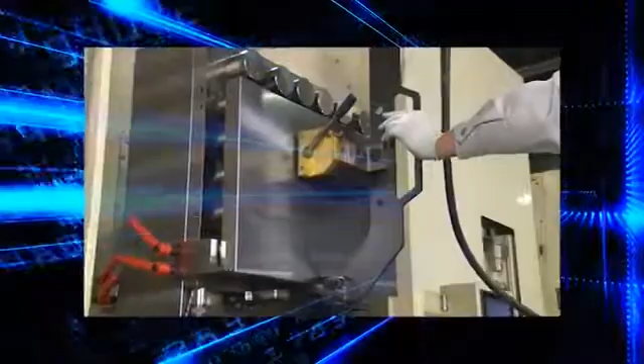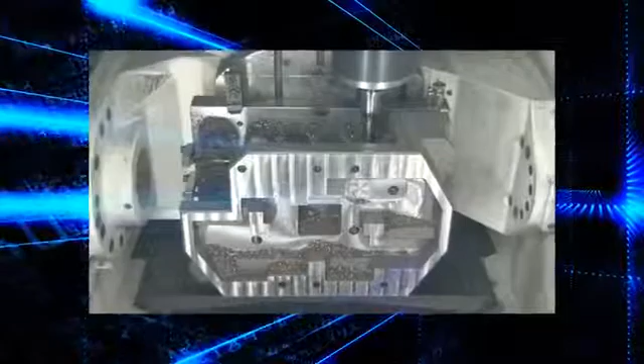The entire workpiece can be secured from the bottom with a single button, drastically reducing the setup times. Less cutting blade interference means machining tasks can be consolidated. Introducing Nabeya's Permanent Electro MTB Magnetic Chuck for Milling.

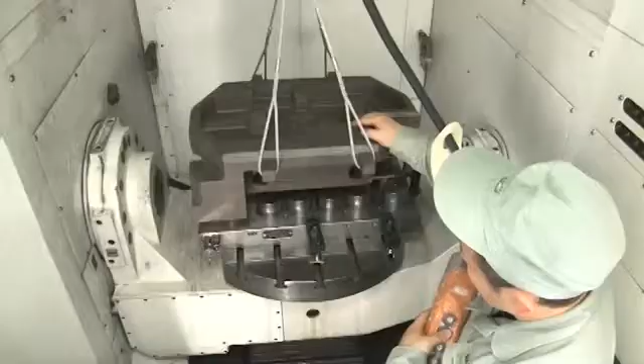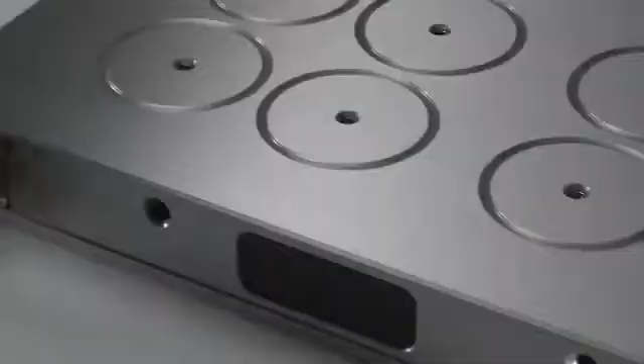As the global production system continues to develop, manufacturers increasingly need to shorten the time spent on setup and machining. At the same time, production facilities are being built in multiple countries, and companies have to work urgently to establish standardized manufacturing methods with increased automation and reduced manpower. Nabeya's magnetic chuck can respond to these needs.

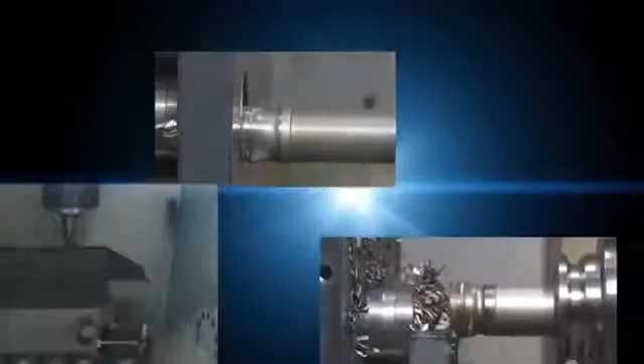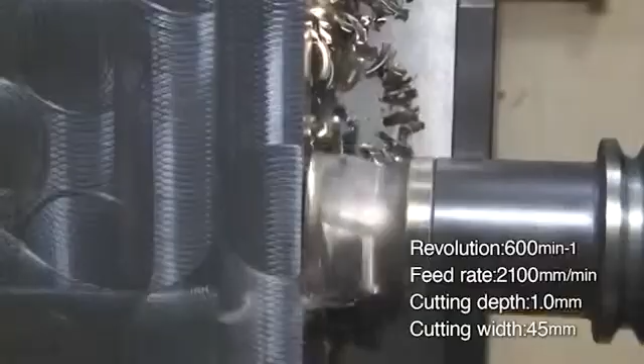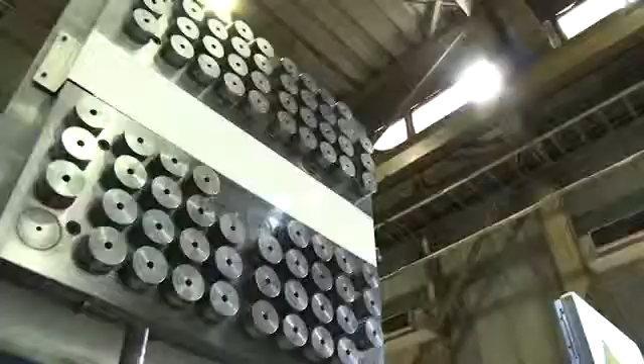Let's take a look at some of the many milling tasks where the magnetic chuck is used. As you can see, the chuck demonstrates its strength not just on top face and side face milling, but on integrated 5-axis machining centers too. Multiple magnetic chucks can be linked via junction boxes, as required to accommodate extra-large workpieces.

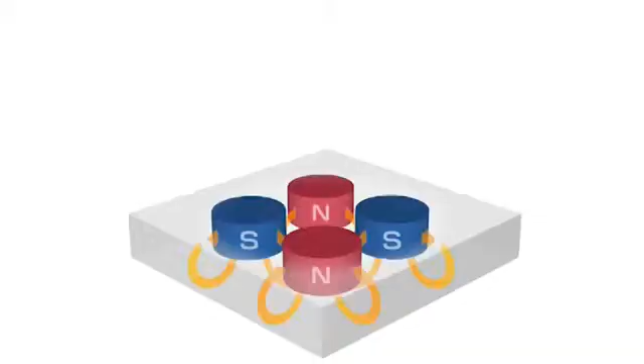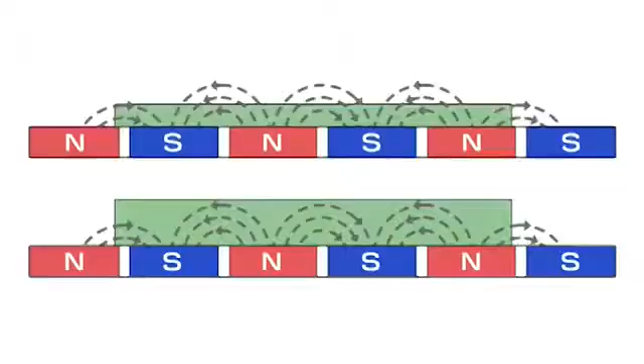Here we shall answer some frequently asked questions. Do chips with magnetic force interfere with the machining process? With the magnetic chuck, the magnetic force loops from north to south poles through the workpiece. This helps prevent the chips from attaching to the workpiece cutting surface. As you can see, even with a powerful adhesion force of 6,150 Newton for each magnetic pole, the chips are not captured by the magnet.

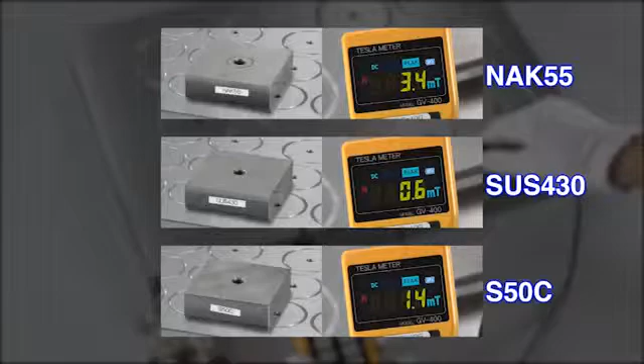Does magnetic force remain on workpieces? The amount of residual magnetism varies, depending on the workpiece material, but it is possible to remove it with demagnetization. We also provide Magheight blocks with a lift mechanism to remove workpieces that remain attached by residual magnetism when unclamping.

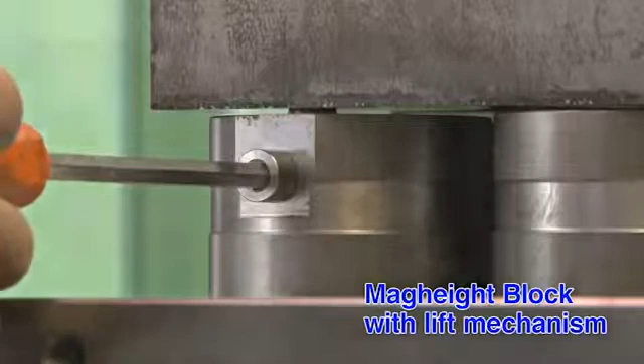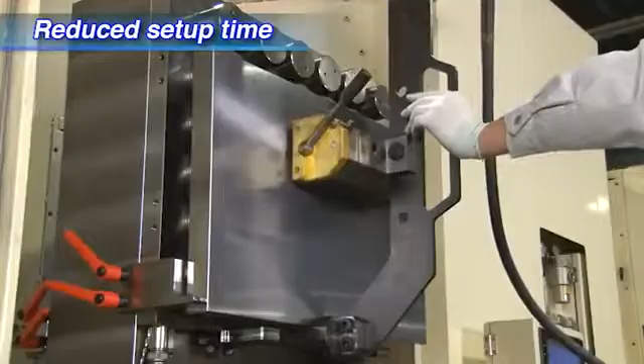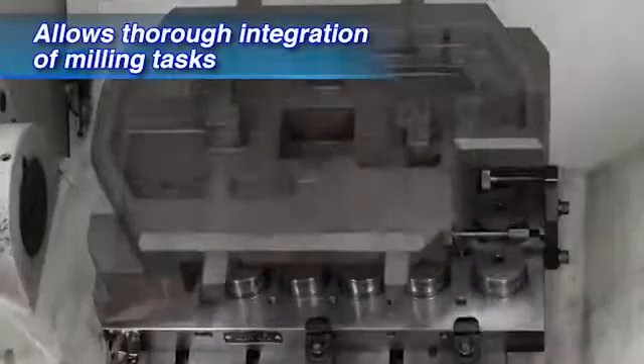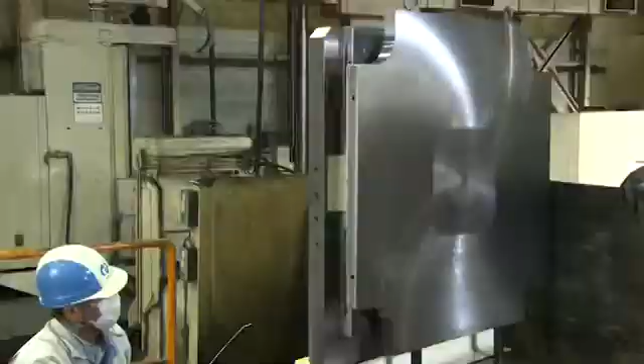Drastically reducing the setup times. Allows thorough integration of milling tasks. The workpiece is secured from the bottom, so clamps do not obstruct the upper or side surfaces. This means milling tasks can be carried out together. Reduces deformations. The workpiece is secured magnetically across the entire bottom surface, minimizing deformations caused by clamping.

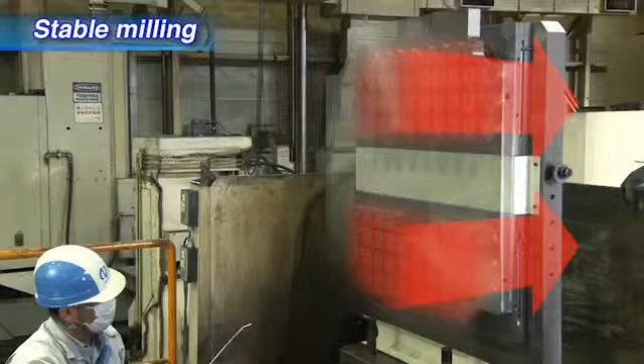Connector cables can be removed during milling. Electricity is not required during the milling, so the connector cables can be removed. The all-metal top of the magnetic chuck prevents cutting fluid seepage for longer surface life.

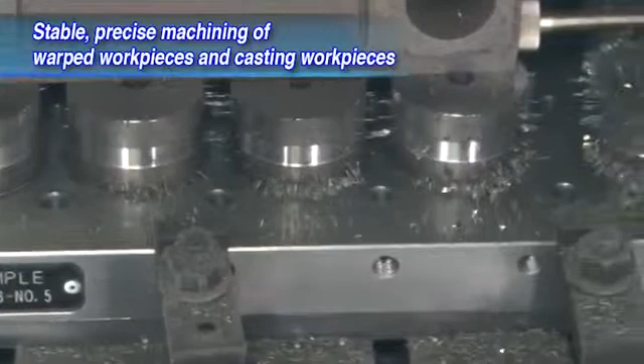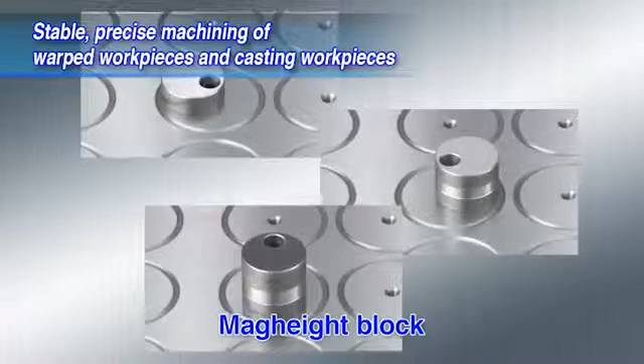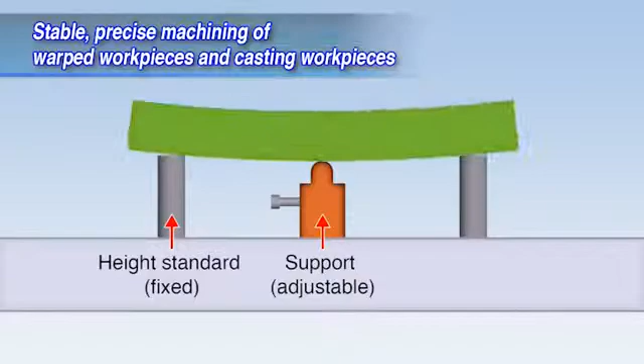Enables stable, precise machining of warped workpieces and curved workpieces with casting surface. With available peripherals, such as Magheight blocks and magwork supports, operators can secure warped and cast iron workpieces as is, simply by placing them on the clamp. Because the entire bottom of the workpiece is secured magnetically, face milling and hole drilling can be performed without deformation caused by clamping.

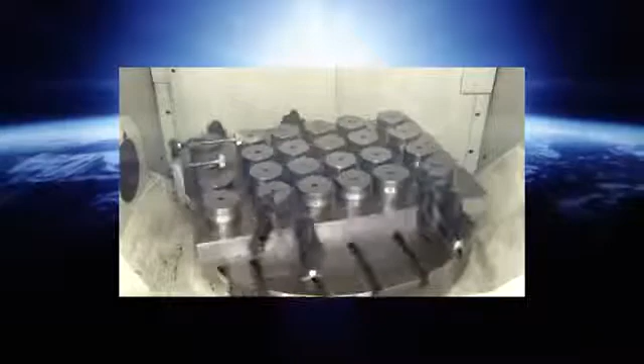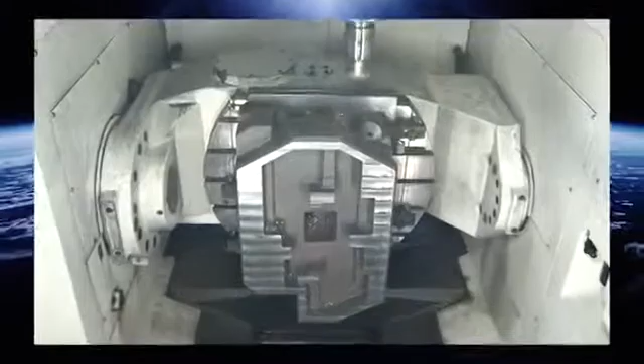The magnetic chuck from Nabeya. Assured quality that dramatically reduces setup times. With less cutting blade interference, machining tasks can be consolidated. A magnetic chuck from a jig manufacturer that promises assured product quality and contributes to reduced manpower, unmanned, and automated robot manufacturing.